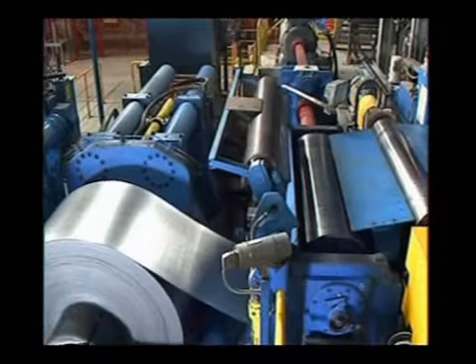The decision to migrate to 3D CAD was the choice of the entire company. All the various locations, Austria, France, and the UK, and the VAI group agreed unanimously to move to 3D CAD software. In the end, Solid Edge was chosen.

VAI is a supplier of machinery for the metallurgy industry. We supply rolling mill machinery for steel and aluminum plants, process lines, and also the automation controls that are part of these large mechanical assemblies.

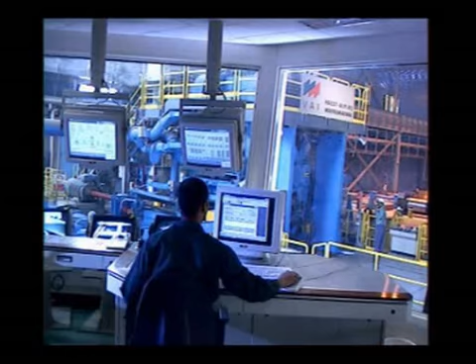Our expertise is our proficiency at designing all these machines, especially the general concept.

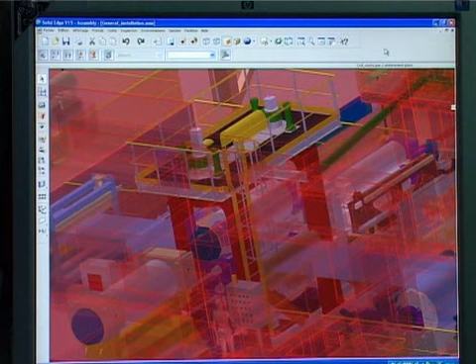These machines represent an impressive volume of parts. If we look for an example, in a complete process line, we could easily have between 700,000 and 1 million parts.

If we look at a specific sub-assembly, a machine that is included in a typical line, it can certainly have 7,000 to 8,000 parts. A process line can be 400 to 500 yards long and in places 30 to 40 feet high.

The decision to migrate to 3D CAD was the choice of the entire company.

Our objective was to design our machinery in the most efficient way, in other words, right the first time, and also in a way that allows it to evolve and be reusable afterward.

Training is something that we take very seriously because it allows designers to be more productive. It is also now clear that the draftsmen spend more time designing the mechanical assemblies, which is the most vital part of their profession.

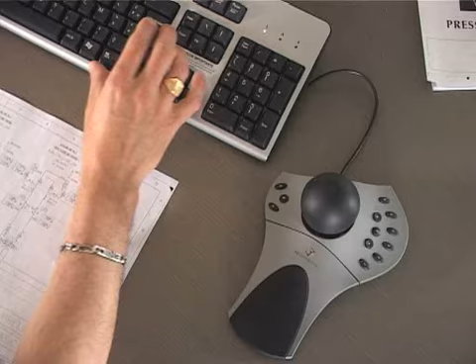For most of the users, it is out of the question that they would return to using 2D. In the design department, Solid Edge 3D CAD has changed the design process.

With Solid Edge, we really have the ability to create real parametric models, which allows us to easily design several versions of the same machinery design.

The purpose of our files is the delivery of drawings to our customers. Solid Edge is very helpful because we can easily update our 2D drawings from a modified 3D model.

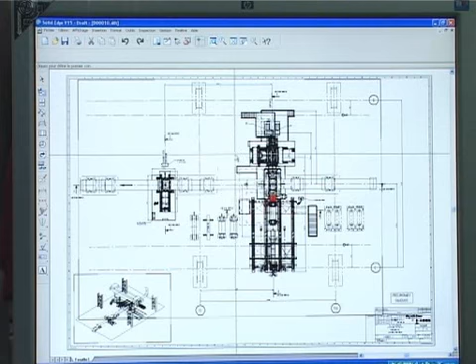The number of drawings per project varies, but there can easily be 600 to 1,000 drawings for one sub-assembly. For a complete line, it can represent many more, sometimes 3,000 to 4,000 drawings.

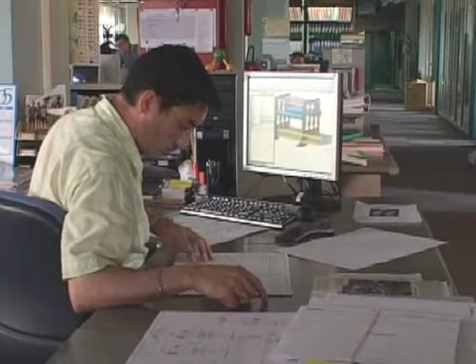In summary, we design large assemblies consisting of many thousands of simple parts. Being able to manage these large assemblies is essentially the real value of Solid Edge. And the second thing, naturally, is the capability to produce drawings, because in the end, that is what we sell to our customers, 2D drawings which we can duplicate afterwards.

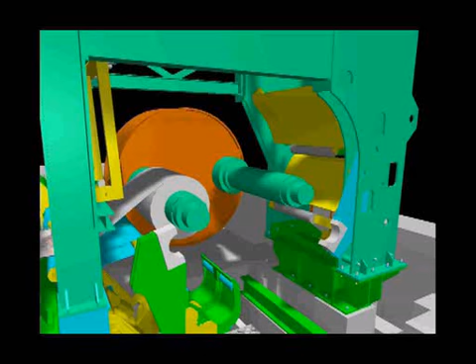With Solid Edge, there is a 20% time savings for machinery design on the assemblies we decide to standardize.

This has a fairly important impact on customers. 20% is really the impact that Solid Edge has in our way of working.